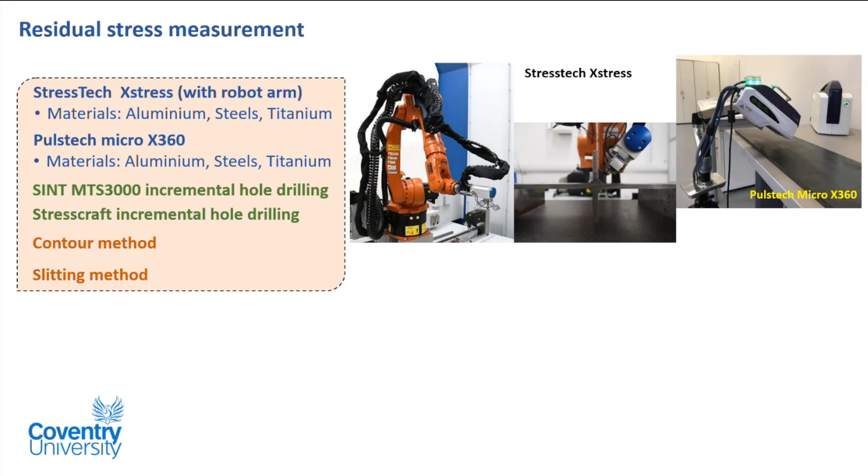So just a few slides to show the equipment. We feel we are quite unique. We do residual stress measurement, and the first picture you see is by diffraction mechanism, so it's the laboratory-based X-ray diffractometer. But the thing I want to show is they've all got a robotic arm, so it can measure 3D shape. The picture in the middle is actually a cruciform weld from TWI, and we were detecting residual stress.

Then there's also a complementary tool, called incremental hole drilling. By drilling tiny small holes, it's not destructive, but it can verify the XRD.

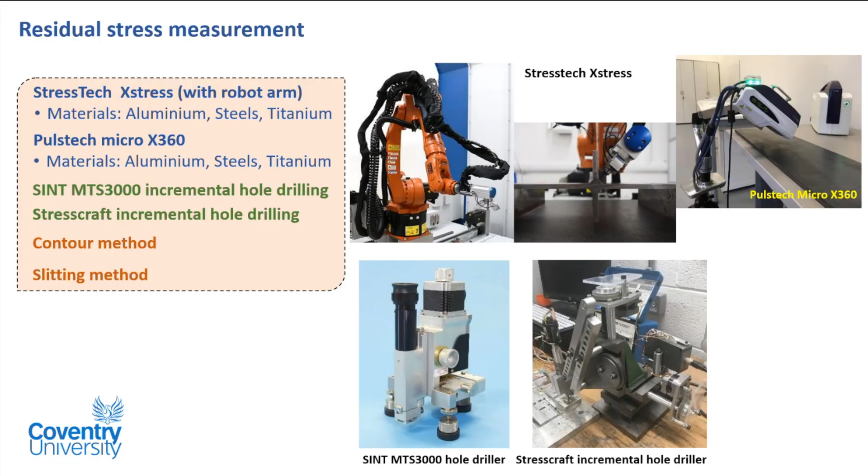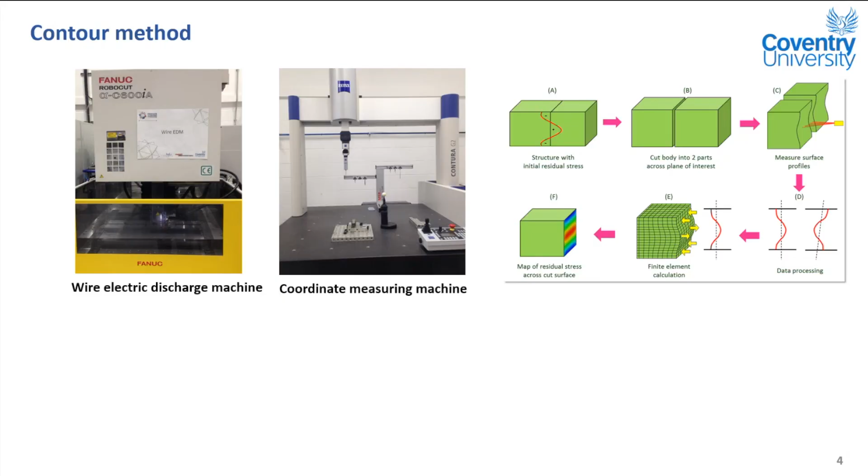The reason we're doing this is for very large scale or thick structures. You either have to go to neutron facilities, national facilities, or even neutron will be restricted by texture microstructure features. So we always like to verify by a destructive method.

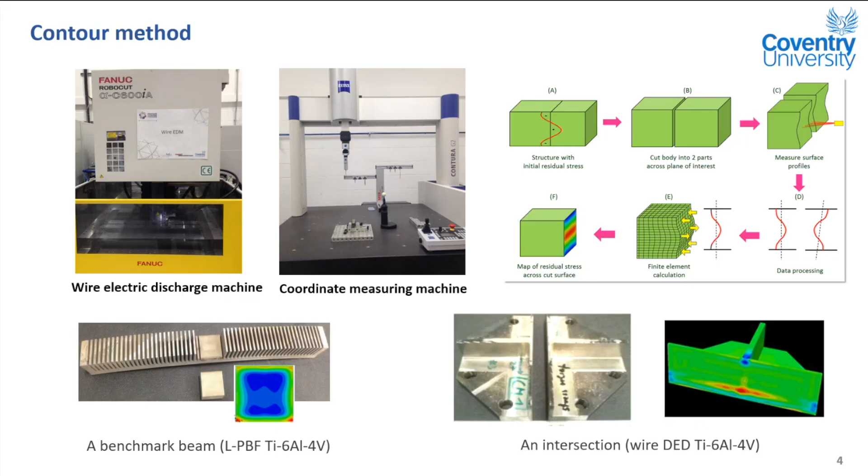So two very good examples: on the lower left is a benchmark beam for laser powder bed fusion manufacturing, and that will determine the residual stress distribution. That was done by Professor Mike Fitzpatrick's team and agreed with neutron with finite element analysis. On the far right is a very complex cruciform made by Cranfield using wire directed energy deposition, and the residual stress was measured on the lower right, then verified by neutron diffraction in ISIS.

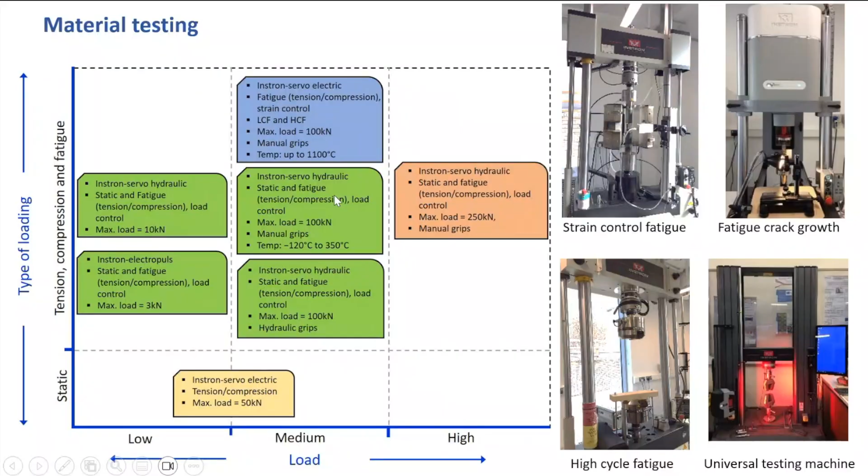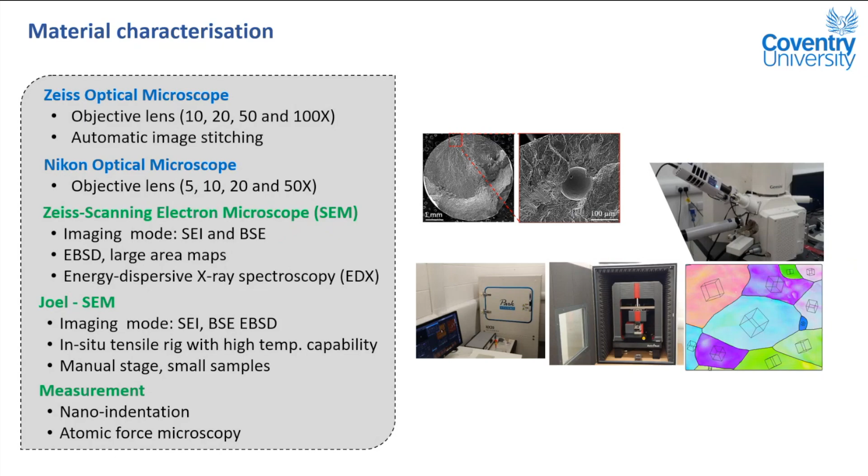I think every university has these standard facilities.

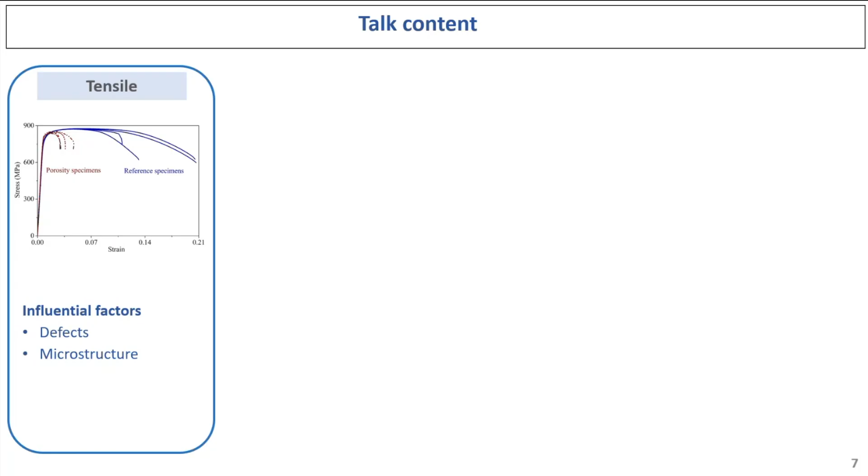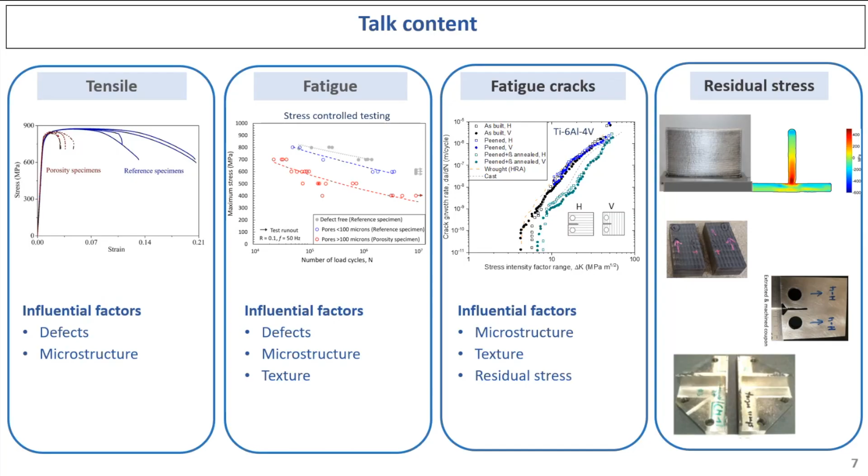My talk content today is I really want to go through all the mechanical behavior and performance that designers would like to know in order to use additive manufacture material for load-bearing safety critical structures. So I will go through tensile, fatigue, and fatigue crack growth rate, and also whether residual stress has a role or can be neglected. I mainly will focus on the effect of defects and the microstructure effect.

Just a few introduction slides on additive manufacturing of metals. I think most people are very familiar with this, so I'll run through it very quickly.

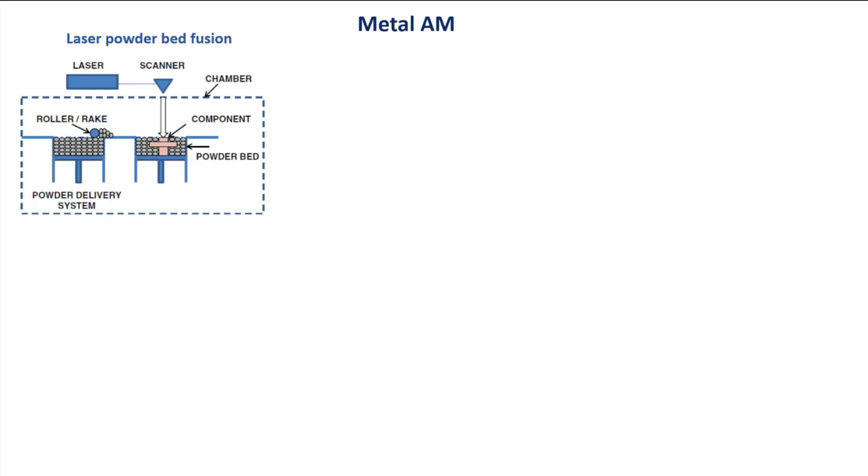The first one is laser powder bed fusion. Then the other version is blown powder directed energy deposition. The third one is wire arc directed energy deposition. The old name for this is wire arc additive manufacturing, also called WAAM. I've been mainly working on the third one in collaboration with Cranfield for the last 15 years.

In terms of the difference between the laser powder bed and the wire arc additive manufacturing, the key difference is their cooling rate. As you can see, the cooling rate for the laser powder bed or electron beam powder bed fusion is at least 1 or 2 magnitudes faster than the cooling rate of the wire arc version.

The advantages of laser powder bed fusion is they have very good layer resolution, up to 0.1 millimeters, so they can make a so-called near net shape component. But for wire arc additive manufacturing, the layer resolution is about 2 millimeters, and even worse for steels, so some material will need to be removed from the surface due to roughness issues.

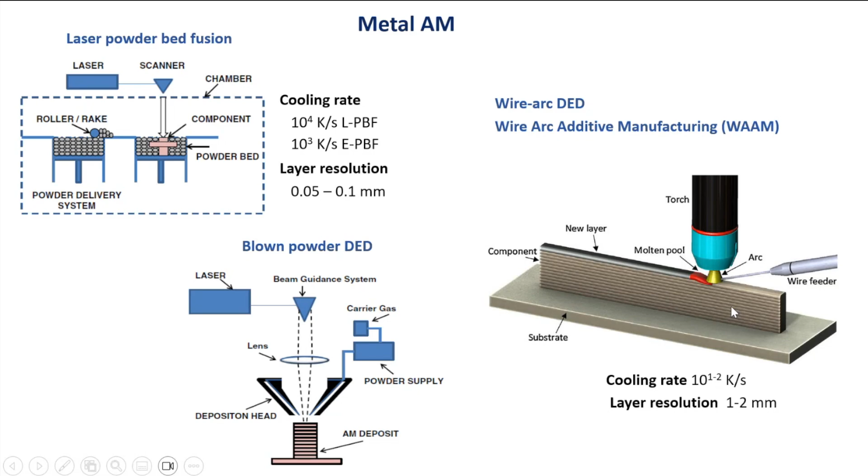So most of my research is related to wire arc DED. My talk today will be focused on this, with one or two slides on laser powder bed fusion.

So the business case for titanium - I should add, the material is very expensive and it's very hard to machine, and also very expensive to discard by machining a very big forged sample into a tank like this. You would need to machine off 80% of the material, very expensive titanium. So there is a business drive for this.

Cranfield has made a satellite propellant tank just by welding the wire layer by layer, two halves, then welded them together. It was tested in Sheffield for proof strength. The benefit of this is cost reduction by 50% in terms of material usage, lead time from years to weeks they claim, and also a bespoke geometry for each space mission.

Just want to say, if you want to make this for cars, probably not worth it, as you need millions of them. But for space launch, you probably just need 12 or 20. So additive manufacturing can really save money.

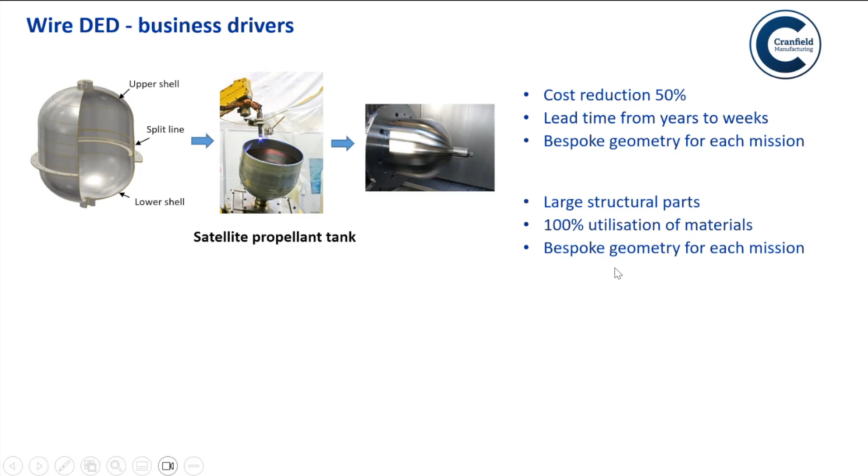Two more examples on large structures. The advantage is 100% utilization of the raw materials and bespoke geometry. So from left to right, they have made a fuel tank for space applications by welding thin titanium wires layer by layer, and also BAE Systems working with Cranfield made a landing gear rib.

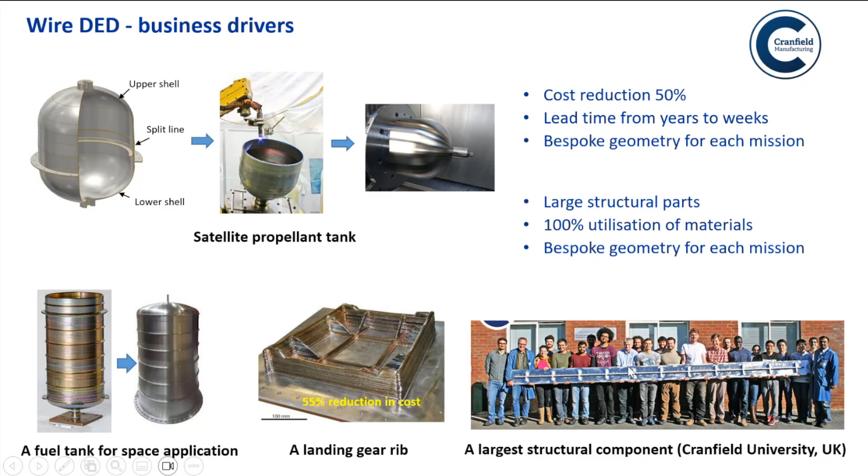They claim 55% reduction in cost compared to machining off from a forged block of materials. And then they made the largest structure component as a demonstrator - several meters long, held by the whole group of Cranfield Manufacturing Center. In the middle is Professor Williams, who leads the center.

I was very fortunate to participate in this EPSRC program grant for the last 6 years, led by Cranfield University with partners Manchester, Strathclyde, and Coventry University. We each lead one big research theme, from process development to materials science and physics-based process. I lead the structure integrity and quality assurance research.

The project has just finished last year. The website at the bottom of the slide shows our research. Most of the topics I'm presenting today are from this research program grant.

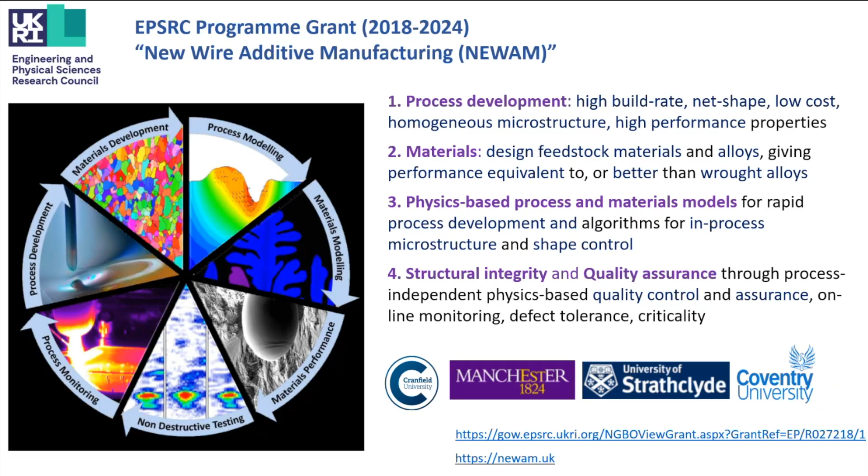The challenges to structure integrity using additively manufactured materials - people often say there are 3. One is residual stress, already there and often in tension, shown in red, balanced by blue in compression far away. But usually the tensile stress is at the geometry change, so people obviously think this is an issue.

The second is heterogeneous microstructure, typically presented by the columnar grains during additive manufacture. This vertical direction is the material build direction, also with very strong crystallographic texture. Then the third one is the defects.

By optimizing the process parameters, lack of fusion from low energy and keyholes from excessive energy can be controlled after so many years of additive manufacturing research. But one of the defects that cannot be completely eliminated is entrapped gas pores - we will always find this. Are they critical to fatigue? This has been my research topic.

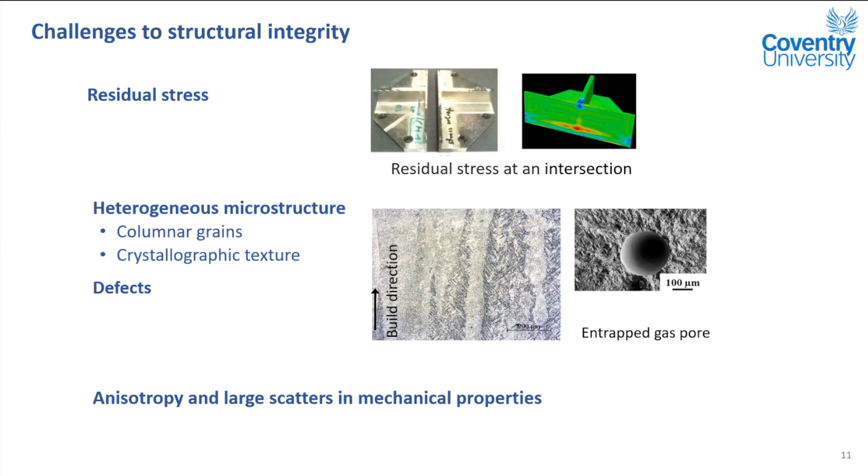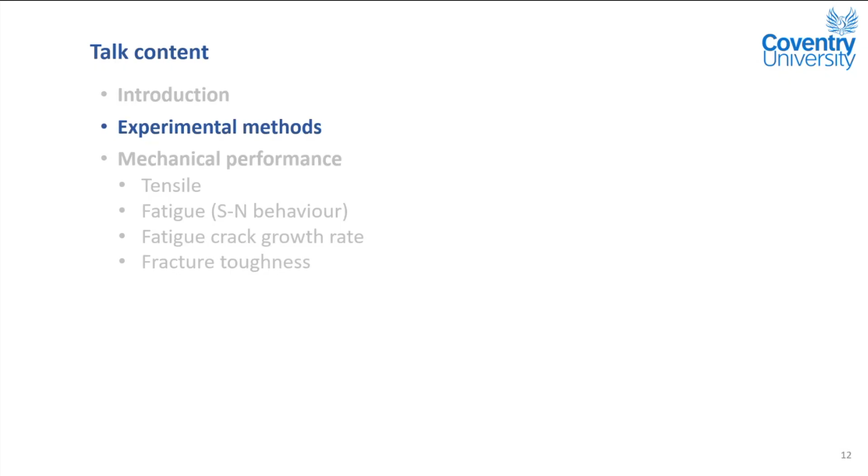So this is my quick introduction. I will move on to experimental method, then talk about mechanical performance one by one, from tensile to fatigue to crack growth to toughness.

For the experimental method, I acknowledge Cranfield made all of these samples for us. If the samples are thin structures like aerospace, they use single pass weld. If thicker, they try parallel pass, four times of welding for each layer, or oscillation. I think the conclusion currently, after 15 years, is they would prefer oscillation build with single pass.

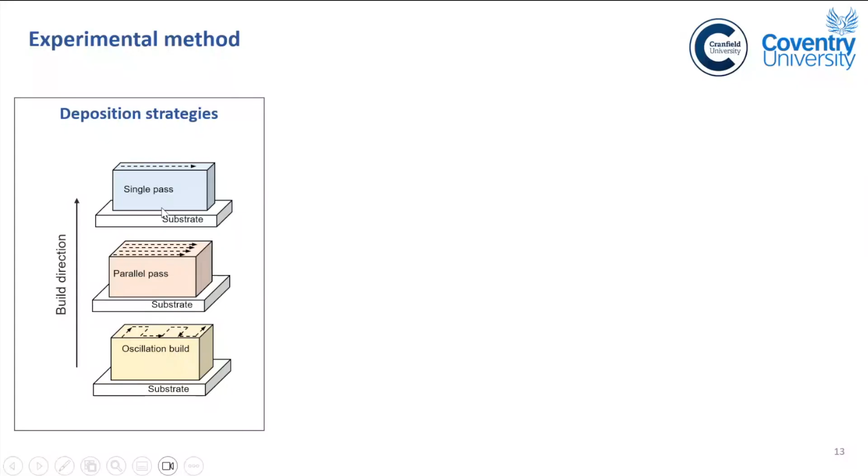For grain refinement, this is to control the columnar beta grains in titanium, to make them more equiaxed, to improve material properties, reduce the anisotropy, and reduce the design allowable scatters. They have tried interlayer hammer peening or rolling, layer by layer, but also thermal gradient control. The second one would be cheaper, not involving any mechanical deformation layer by layer. They also tried post-process annealing, heating the material above the beta transus temperature for titanium to introduce beneficial lamellar large colony structures.

I will talk about this. They also studied global versus local shielding. The picture here shows the hammer dropping on these walls, and every time you build a layer, the hammer will peen.

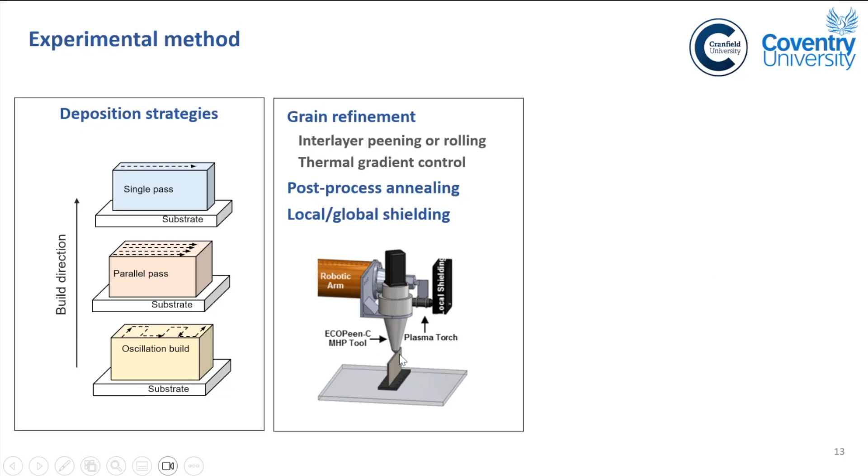In terms of my material samples, all I receive is what I call walls. If you see my slide, the wall is quite big, like 100 millimeters by 200 millimeters long, 100 tall. Then we extract dog bone samples, either in the build direction or horizontal to it, for tensile and fatigue S-N curves. We also work on fracture mechanics properties, using compact tension specimens for fatigue crack growth rate, and also measure fracture toughness for cracks either parallel to the layers or transverse to the layers.

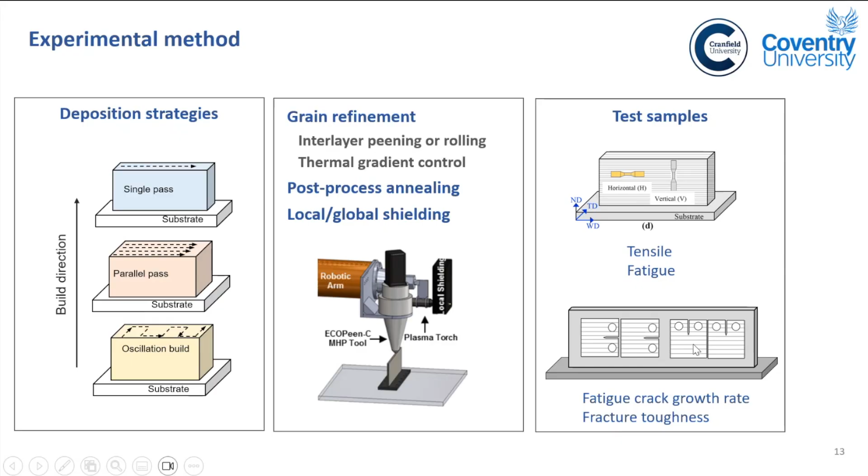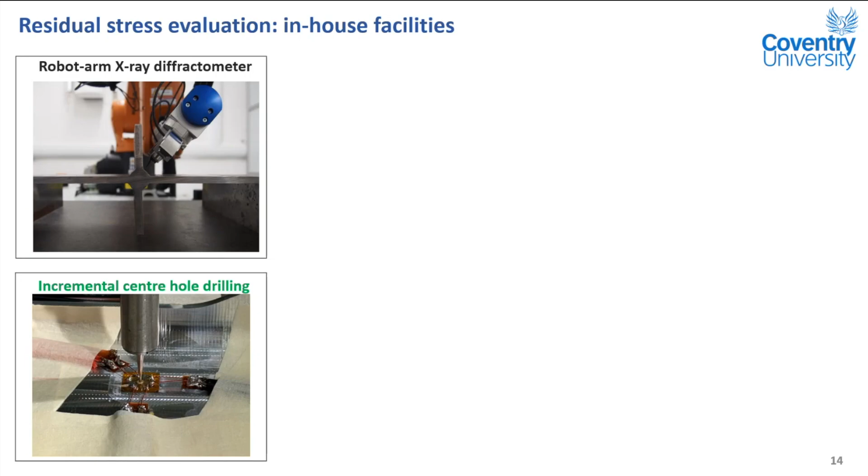For residual stress evaluation, we use our in-house facilities, but we also go to the national neutron facilities, and we use a contour method to check the through-thickness change.

Before I talk about mechanical properties, I really want to show how big an issue residual stress is in the wire DED problem. We always have residual stress. The horizontal material is a substrate made by wrought materials or forging, and the verticals are walls. So these 110 millimeters are 140 layers or more.

We studied Ti-64, and also Ti-64 with interlayer hammer peening, and a low alloy steel, ER70S steel, which is very weldable, and also used in offshore energy where people like it to repair or clad corrosion damage, for example. We also measured the Waspaloy, this is a new name, I think it's mainly nickel-based with some steels. All of them show the red zone is at the intersection with the substrate, then there's some compressive stress to balance it.

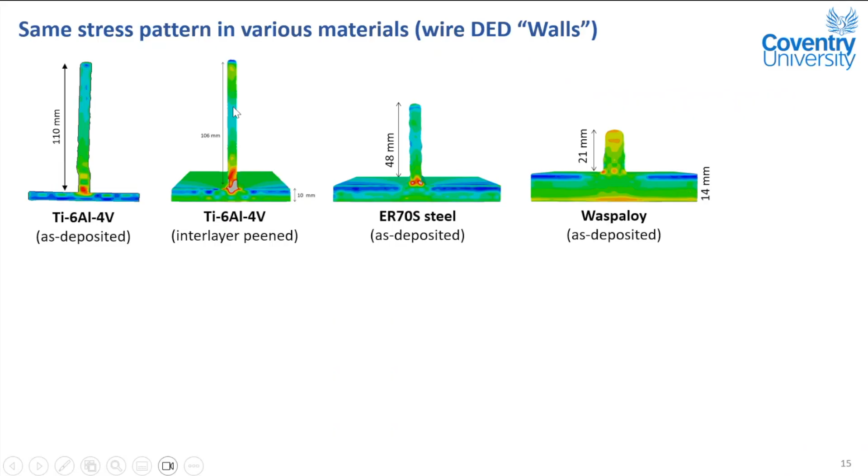The measurements really agree with the theoretical formula by Professor Williams and his colleague. There are two separate papers, quite well known. They basically say residual stress, the arrow to the left or right, is tensile and balanced by compression, and that bending moment is balanced by the reverse bending of the substrate. The two papers on the lower right were written by my student or postdocs, mainly to model a thermomechanical model to understand this.

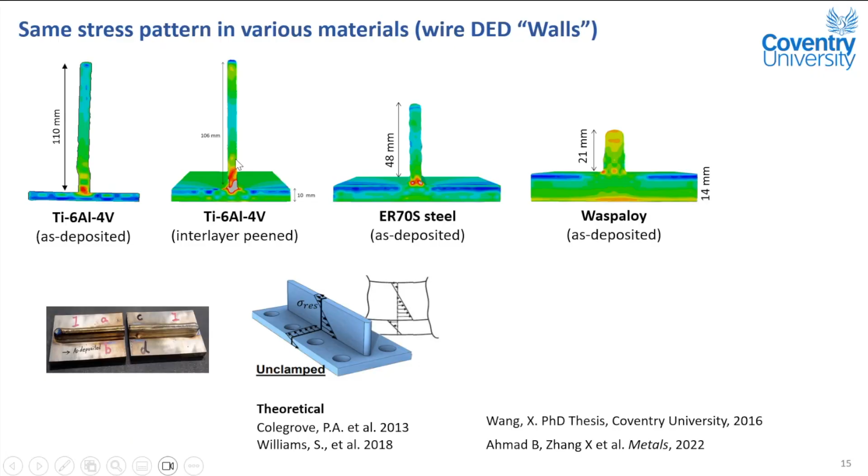So this slide is quite important. What I really want to say is, in the wall, residual stress is quite high, about the yield strength of the material. But when you actually extract these very small compact tension samples or tiny dog bones for tension, all of them are released because there are free boundaries, there's no material to hold the residual stress, so they are released. The maximum stress distribution from the notch root of this sample to the edge of the sample is actually below 50 megapascal, and that was caused by the notch root stress concentration.

It's not a real residual stress, because we also verified this by not having a notch and just extracting a tiny small block from the great walls. And we found in this paper, 2022, residual stresses are relaxed.

So what I want to say is the mechanical properties I present today are materials' intrinsic properties. This is in contrast with powder bed fusion material, because they only make near net shape material - they don't extract samples, they may just polish the surface to remove roughness or remove tiny small layers. But for the wire arc DED, we actually extract the samples, many of them from one wall, so residual stress is released.

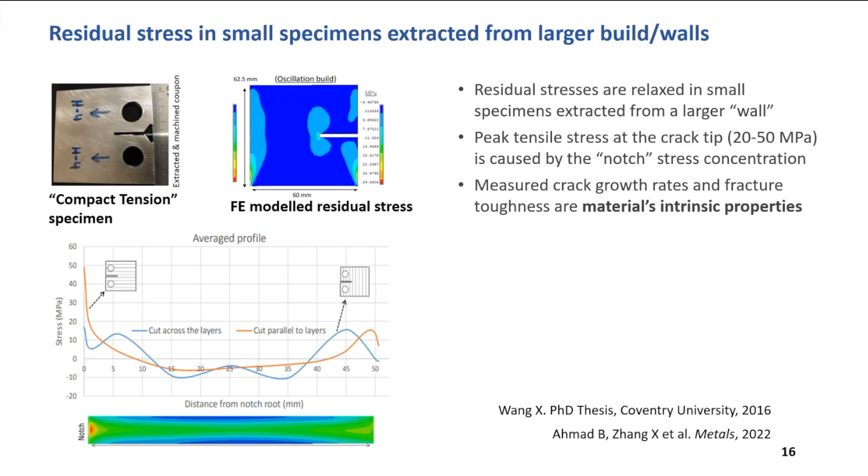So with that, I just have one slide to show. In the methodology, we were probably the first people, about 10 years ago, to embed gas pores on purpose. So for the wire arc additive manufacturing - can someone confirm you can see the mouse movement?

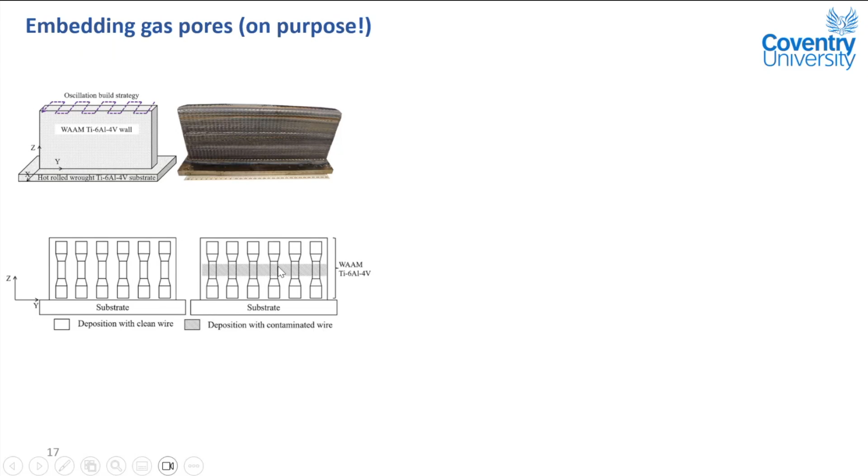For the wire arc additive manufacturing, we use a clean wire to produce the samples on the left, but we also deliberately use contaminated wire with some greasy oil to produce the gauge length of our tensile samples. This has been a real problem for people not using clean wire - when they look at the fractography, they found more gas pores. So this was deliberately designed experimental work for PhD projects.

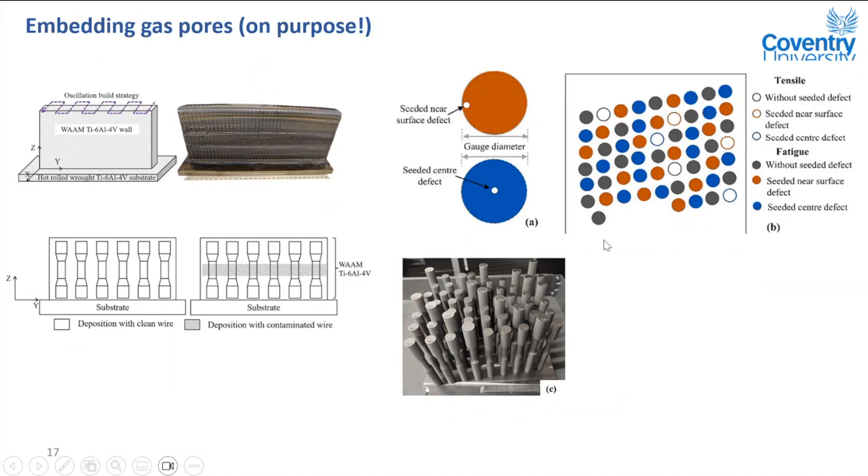For the powder bed fusion, I participated in a project by the Manufacturing Technology Center, a catapult in Coventry. They actually use laser powder bed fusion, so that's a near net shape build. They build so many, and these orange colors show where we embed one pore, called a seeded pore, by computer-aided design - in that layer they don't print material. Then in blue, they also print defects in the middle. These are not lack of fusion or keyhole defects, these are entrapped gas pores.

By computer tomography, we could confirm the pores are still there after manufacturing. This is an MTC-led project called Model Farm. So that concludes my methodology section.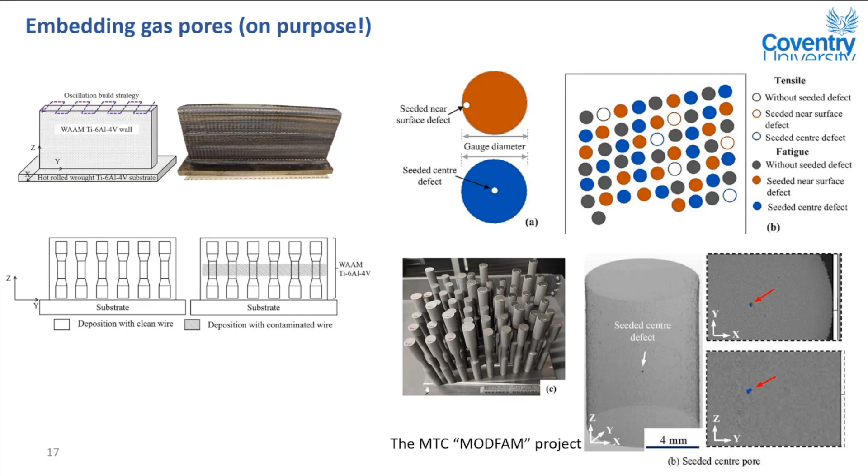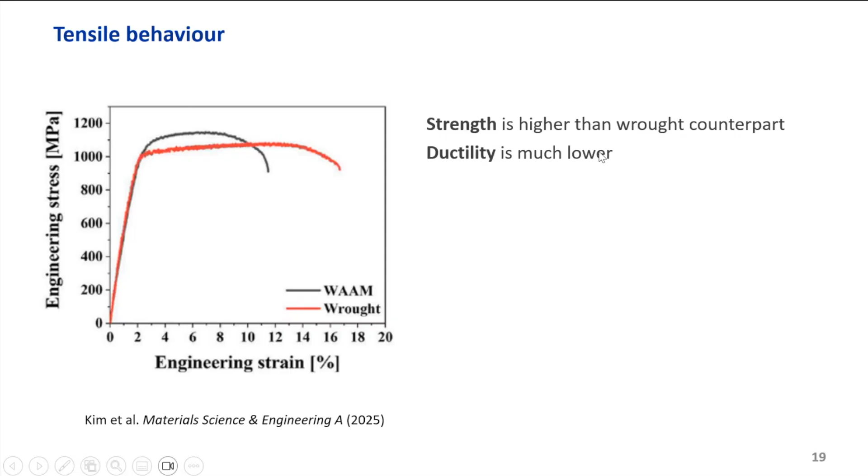The main message is the strength is okay, and even higher than the wrought counterpart, but the ductility is much lower. This has been the consensus for the last 10 years - people found strength is okay, and the reason is the finer grains, much finer grains for the additive manufacturing.

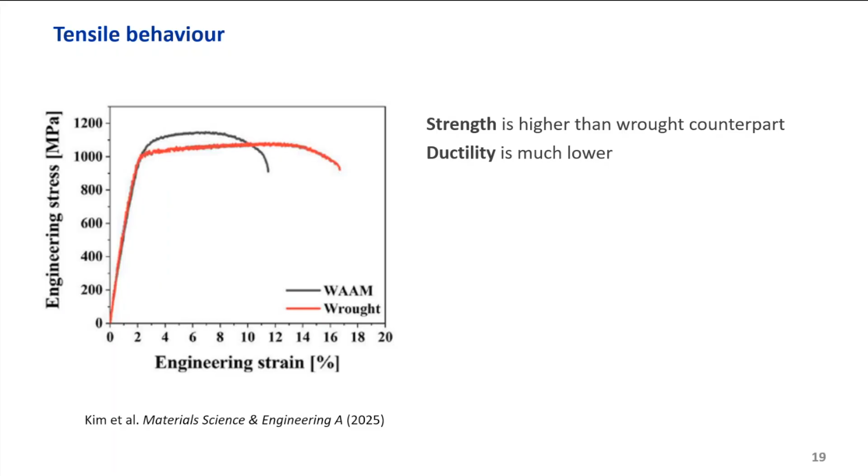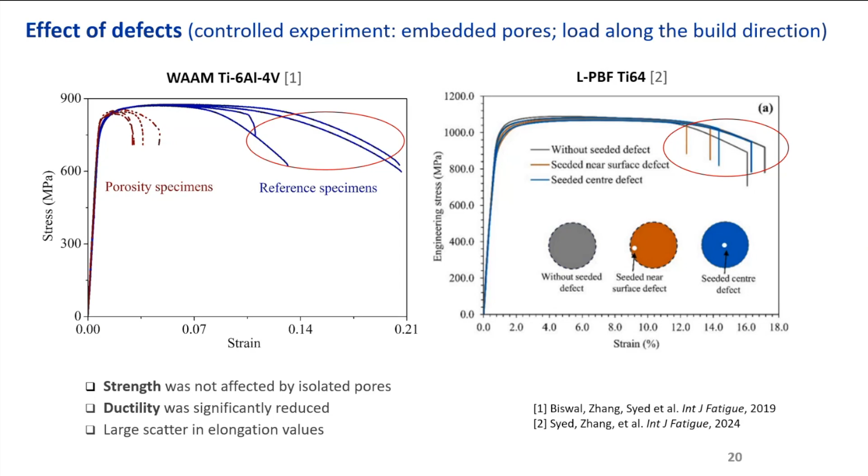In a separate study of laser powder bed fusion Ti64, it's the same story - strengths without defects and with defects are similar, they can reach 1,100 megapascal, but the elongation suffers. Without defects it's the black curve at 16%, but with defects elongation is reduced. What I'd like to say is it doesn't depend on how many defects you have, it always depends on the biggest one, and the location probably matters more. I will conclude this after the fatigue testing section.

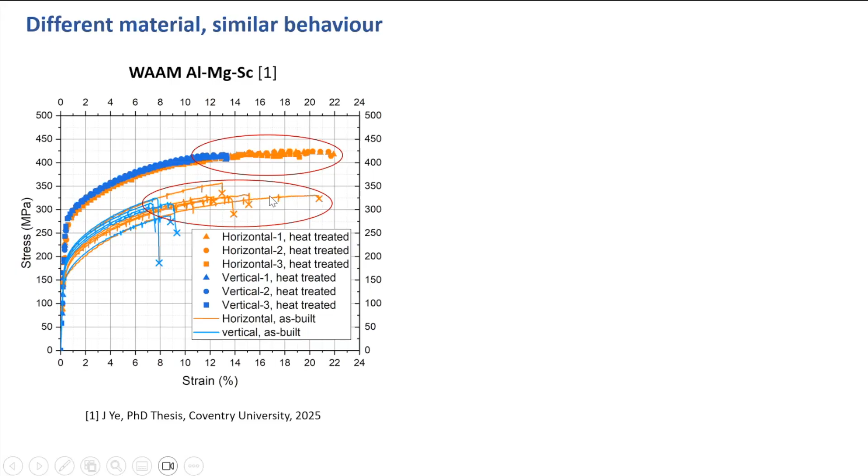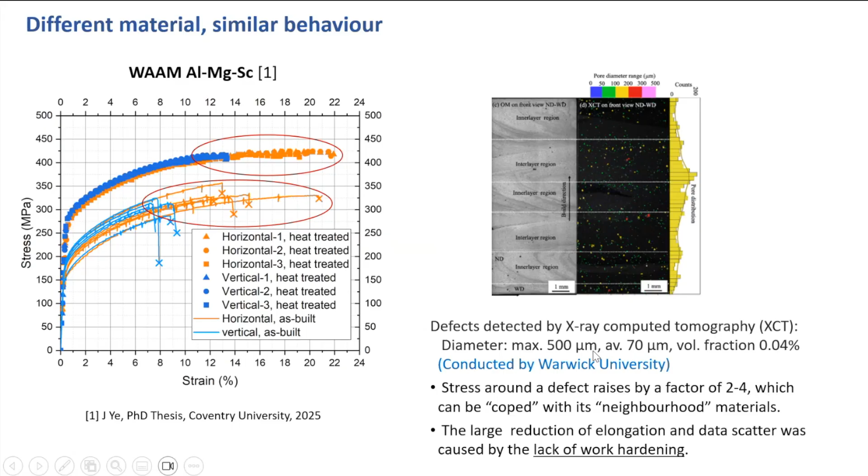Stress around the defects will raise by a factor of 2 or 4, so that can be coped with by neighboring materials. They all work together to reach the yield strength. But the defects will reduce elongation because there's no work hardening. Most aerospace materials really lack post-yield work hardening, so the elongation will suffer.

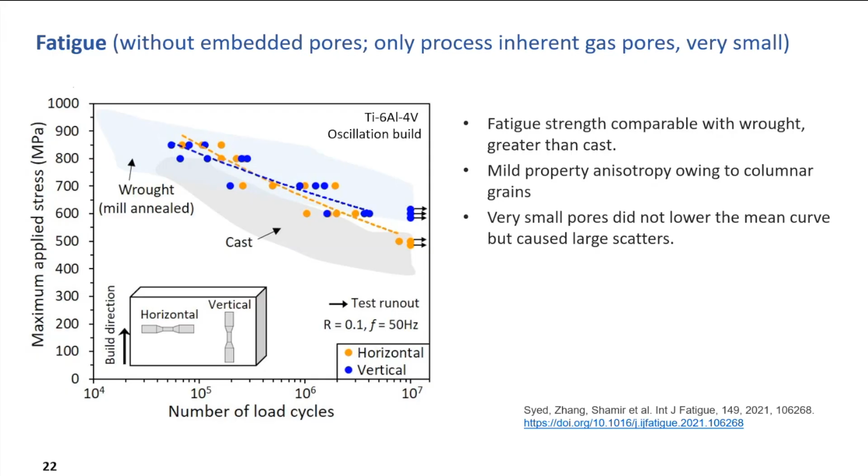Very, very small pores did not reduce the mean curve, but they probably caused the large scatter in the data. I can elaborate this a little bit later after I talk about purposely embedded pores.

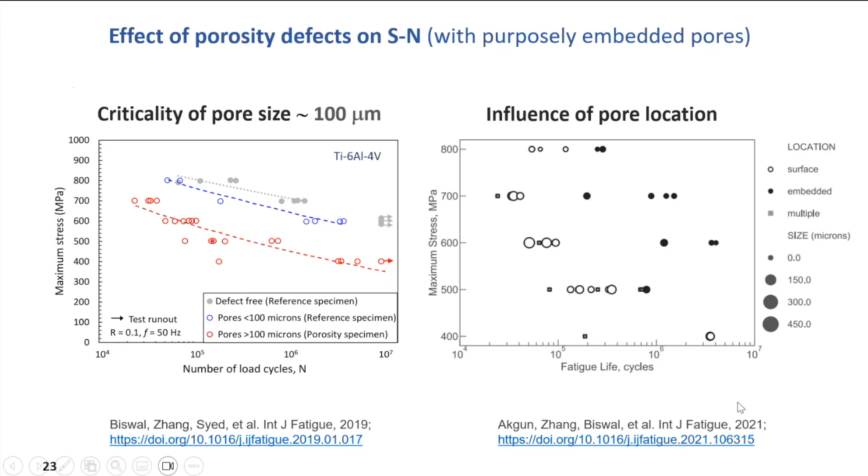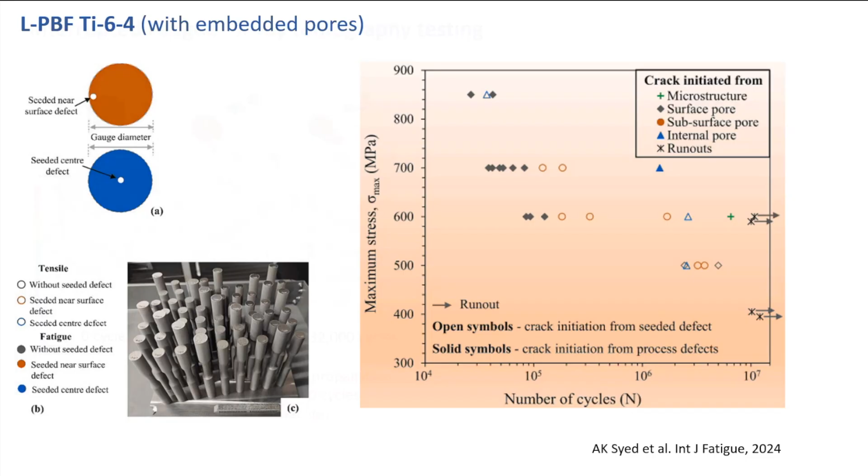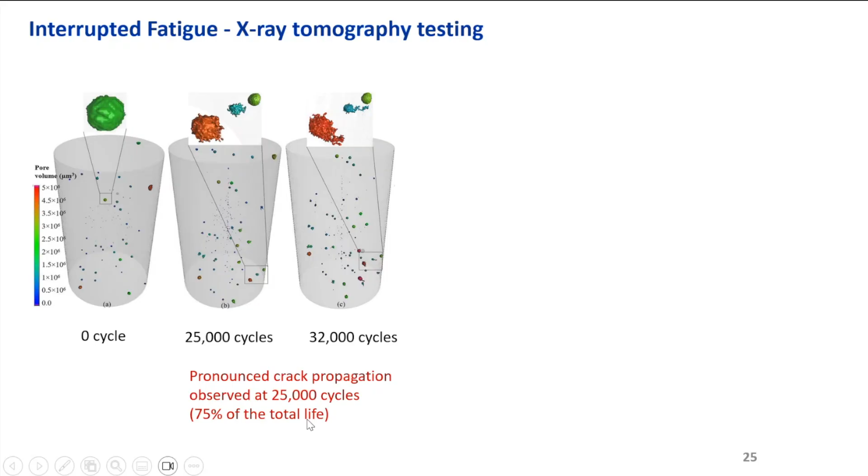I'll just move on quickly. We also did a tomography we call interrupted tomography. After every 5,000 cycles, we stop fatigue testing and do X-ray tomography. We found pronounced crack propagation from the pore around a certain percentage of the total life. Obviously, this depends on the stress levels applied.

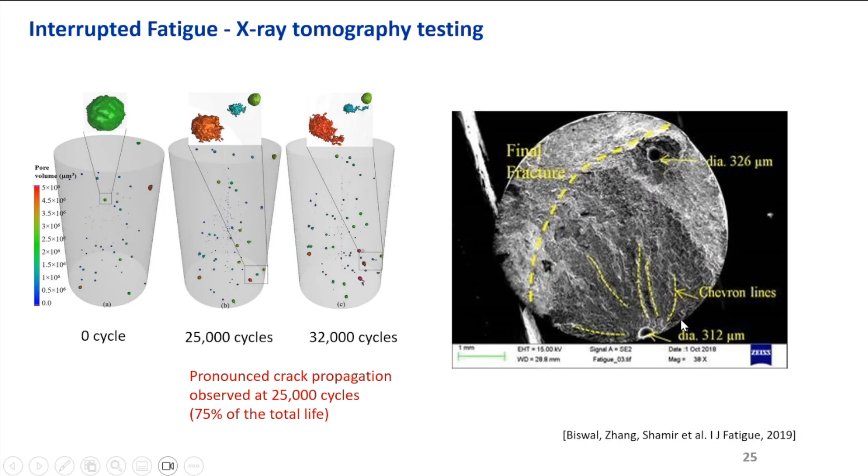What I really want to say from this fractography picture is that there is always one killer pore. It's not depending on how many you have - it's the killer pore, and also its location. These big ones in the bulk of the material are almost like hibernating there, but the one very near to the surface is critical because the stress concentration is high - there's no material on the other side to carry the stress.

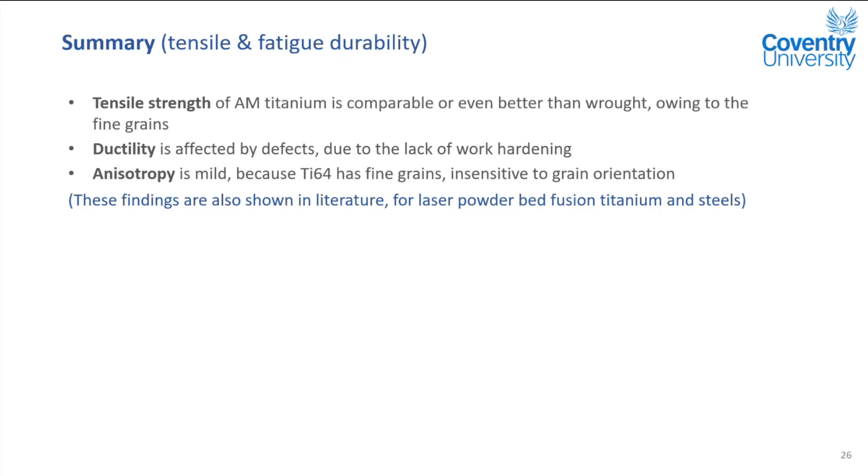So with that, I'd like to conclude: tensile strength is very comparable to, or even better than, traditional wrought material because of the fine grains in additive manufacturing. Ductility is affected by defects and due to lack of work hardening in titanium. Anisotropy is mild because titanium alloy has fine grains. These findings, which I wrote in blue, agree with independent research in literature. In terms of fatigue, it's all related to defects - and it's all related to one killer defect, whose location is much more critical than its size.

So for our material, we show this is around 100 micron in terms of diameter by fractography. And this broadly agrees with other people's findings.

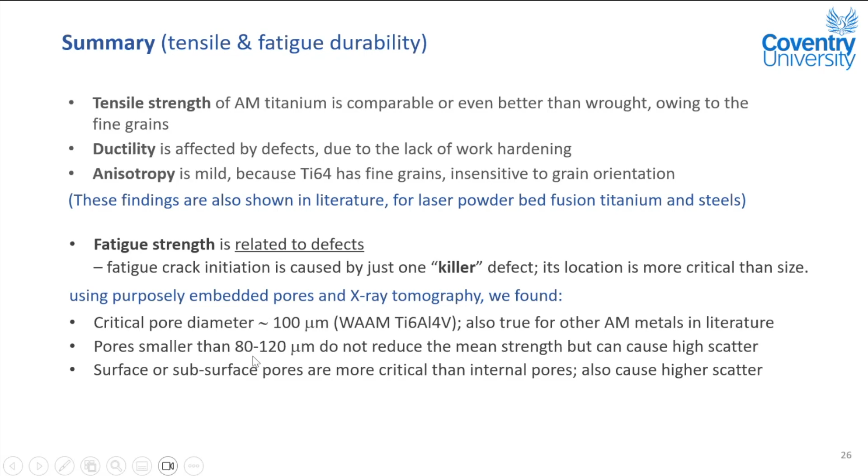So I think I will quickly move to my final testing, which is the fatigue crack growth behavior. We have these very large walls: one is thin for aerospace applications, the other one is thicker for energy sectors. And we cut many of these small compact tension specimens with two crack orientations.

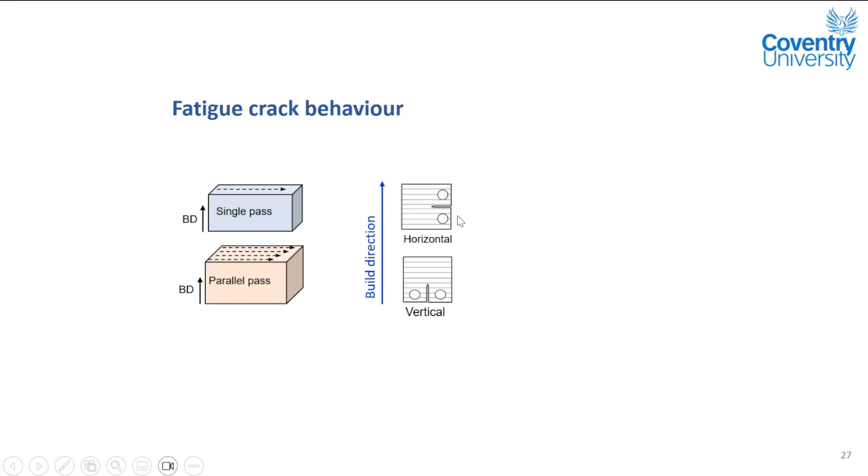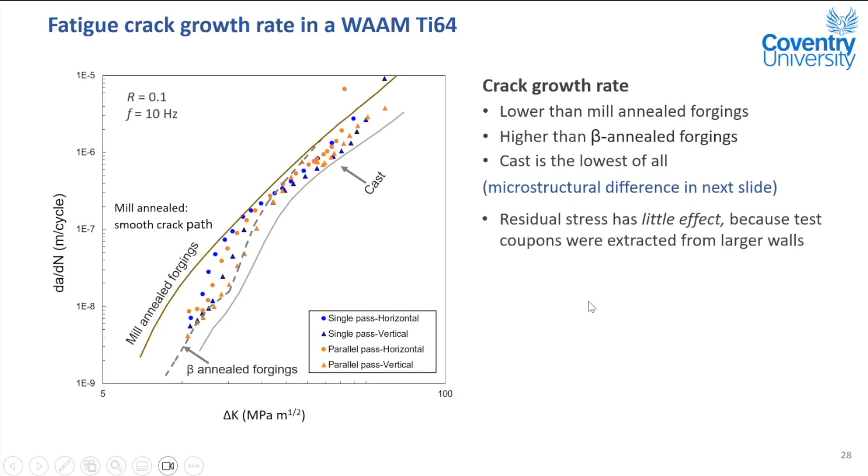I will show this in the next slides. These all rely on the microstructure difference. The traditional hot roll material has an equiaxed or globular microstructure. They don't stop crack growth - crack can just go around them, around the grains.

But with a beta annealing, you create a Widmanstatten microstructure, and that causes a lot of resistance. It's quite a large colony alpha lath, so the crack has to grow zigzag around it - a lot of resistance.

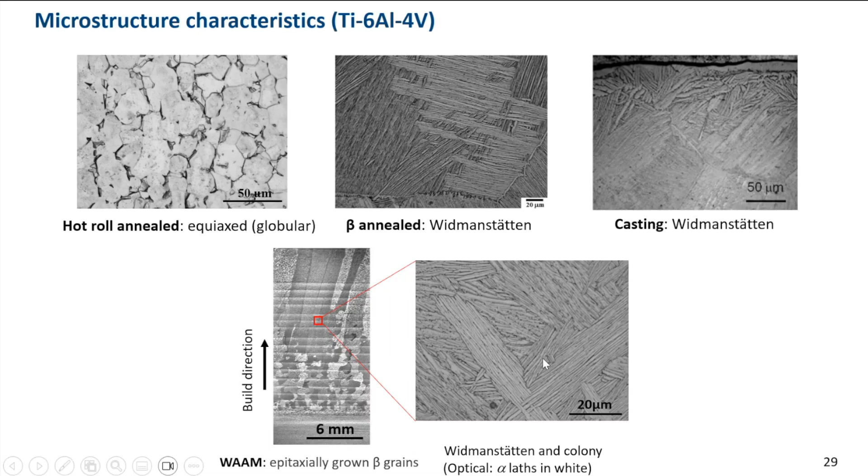And casting being the best is because they have the similar Widmanstatten microstructure with very large colonies of the alpha lath in the same orientations. For additively manufactured material, if we do a beta annealing, we could achieve this situation like the casting. But if we don't do the post-process annealing, it will be just like the ordinary lamellar structure. So the microstructure really determines how fast the crack propagates.

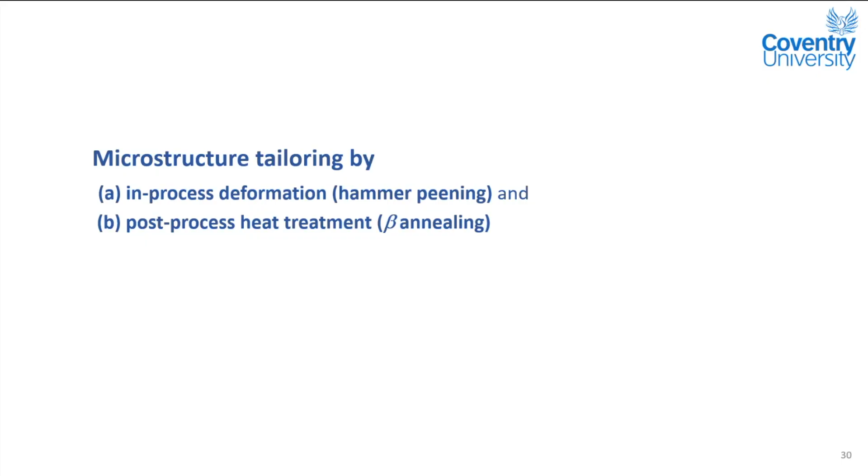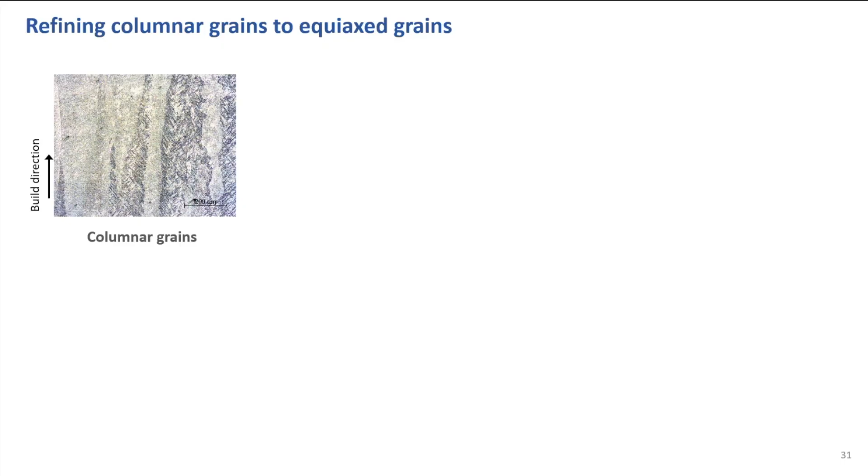So with that knowledge, about 3 years ago, we started to study microstructure tailoring - by in-process peening and also by post-process annealing. The reason for this is trying to make the columnar grains become equiaxed grains to have good isotropic properties. I had 3 options.

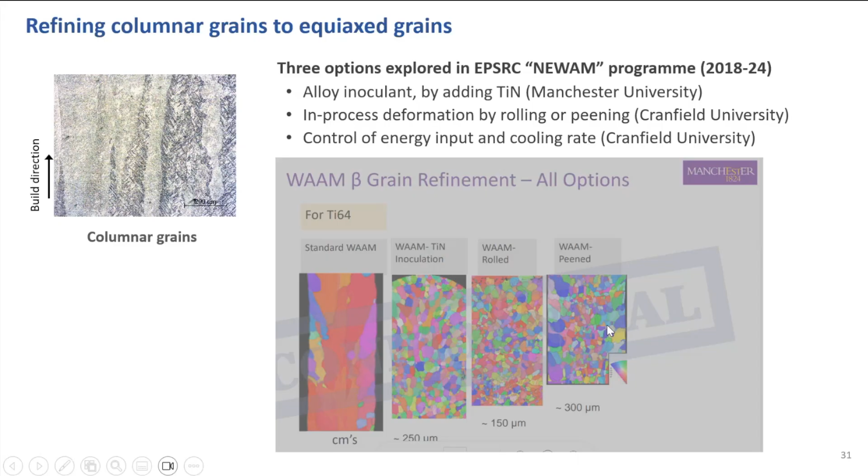Manchester is working by adding TiN content. Then Cranfield is doing thermal control or rolling, and also thermal energy control and controlling the cooling rate. So of these 4 pictures, I picked up the last one. After peening, the far left very long columnar grains become equiaxed grains, very small, and hopefully it's isotropic properties. So I just show you this one with peening.

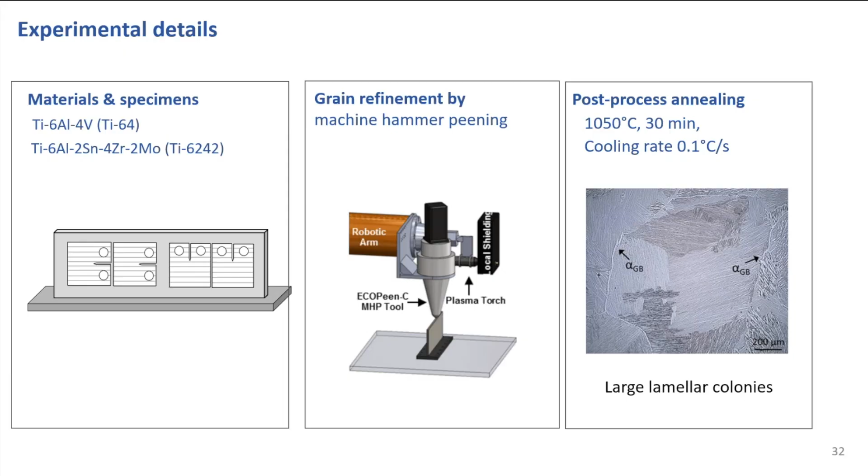After the beta annealing at this temperature, the microstructure becomes large lamellar colonies, has a lot of resistance to crack growth. So before I show the crack growth, I just want to show you very quickly the optical graph on the top and the EBSD images at the bottom, which really shows on the far left you get large columnar grains in the as-built condition.

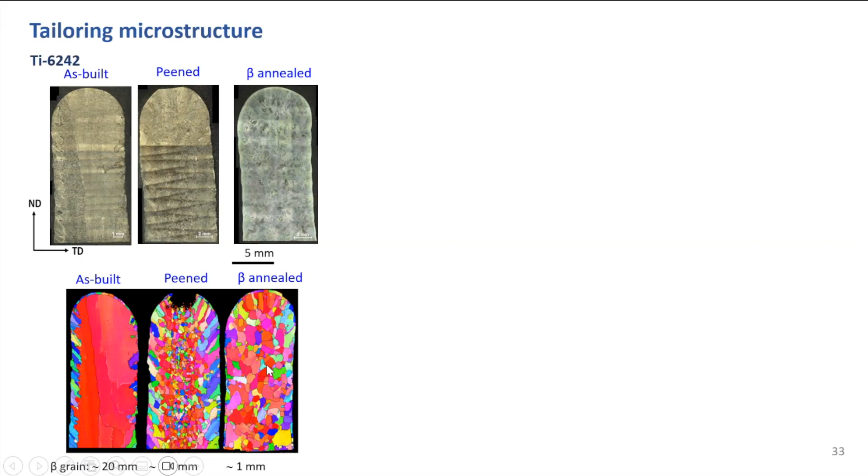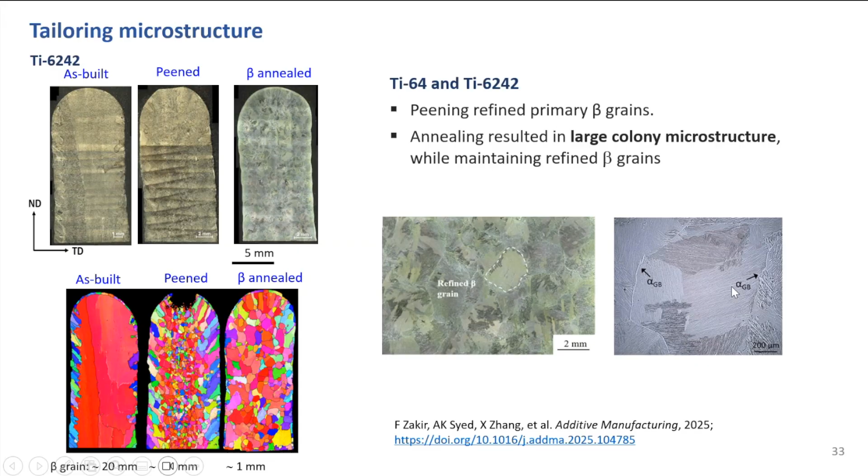Another good news is the starting point for crack growth. The threshold value, delta K threshold, is delayed by 3 times. So the crack growth will not onset until much later.

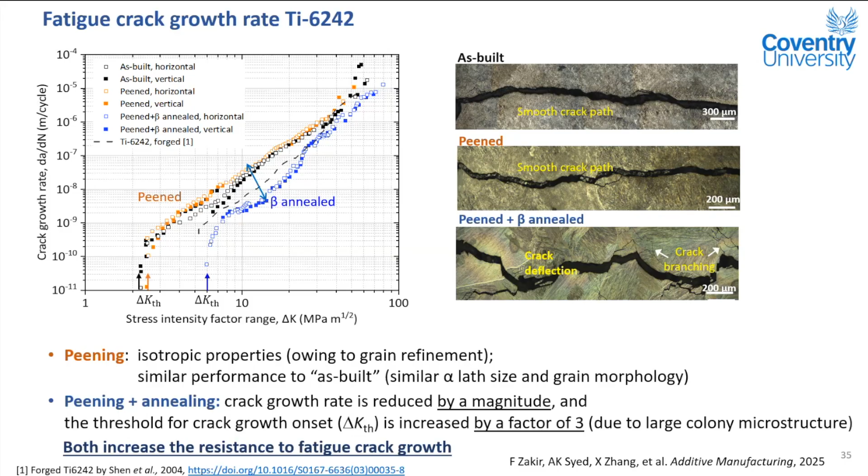So I think I just skipped this - I have basically said all of this. So another example is to show...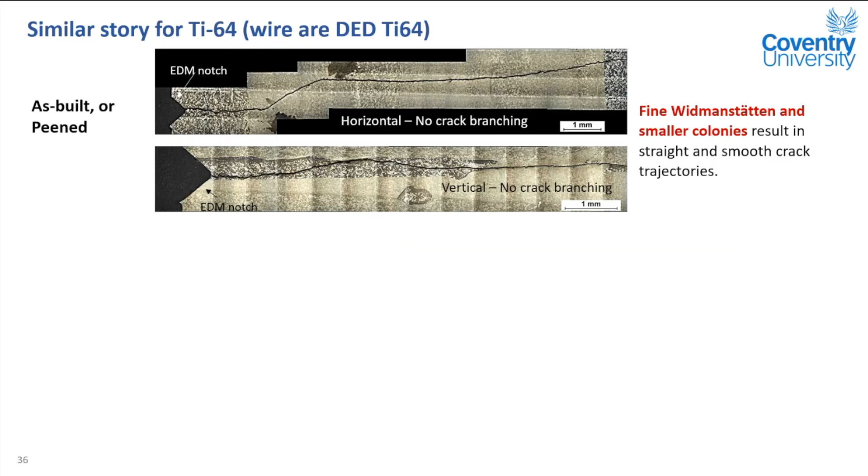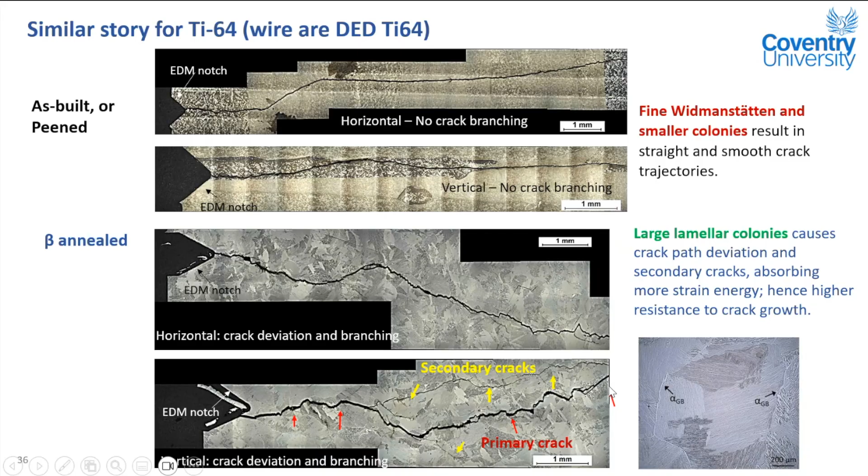The story is the same for Ti6-4. Previously, I showed the Ti-6242 is a high temperature titanium, and shows with beta annealing, there is a lot of resistance to crack propagation. So I think I just summarized this fatigue crack growth rate for the wire DED.

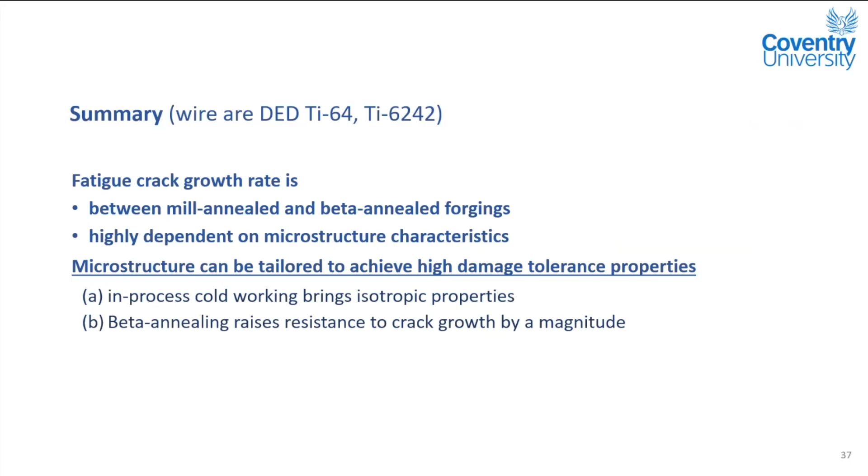I can leave my slides here, and I think I should leave 10 minutes for questions. Is that okay? Yeah, perfectly fine. Okay, so I have a few modeling slides, but I think we probably can talk about it later.

So I want to thank you for your time. Oh, thank you. Thank you so much.

Thank you for a wonderful talk, with the methodical way of studying the porosity effect and anisotropy, all this on the mechanical properties, especially fracture and fatigue behavior. I think questions are coming from the audience.

Harry, please. Yeah, thank you very much for the nice talk, very informative. I just have a question: in many cases when we make additively manufactured components, they are hot isostatically pressed to seal up the pores. Have you tried something like this?

Yeah, that's a very good question, Professor Harry. The powder bed fusion people always do that because they have a lot of turbulence in their build chamber, they have entrapped gas pores. For Cranfield-made wire arc additive manufacture layer by layer, they probably overlapped a lot, so we don't find it necessary for titanium. However, they do it for steels.

Okay, thank you, yeah, that is very important. The MTC people also found that HIP can shrink the entrapped gas pores, but may not be completely closed yet, so with elevated temperature loading they may open up. That's not my area, but I have seen these papers. HIP is a standard for powder bed fusion though.